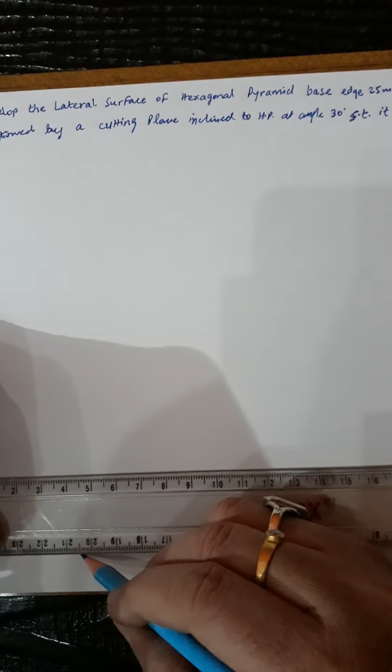So hello students, in this video I will discuss how to develop this truncated hexagonal pyramid. The base size is 25, height is 60, and the cutting plane is at 30 degrees with the HP and it is bisecting the axis. Now I will first draw this regular hexagon as usual by using the circle method. So 25 mm is the base size.

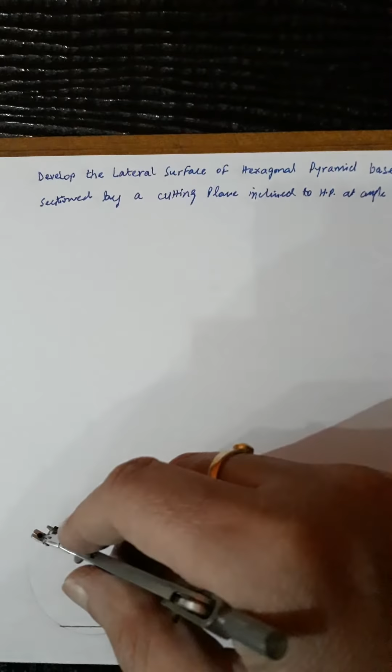Now I will be using this circle method to draw this regular hexagon. I will be drawing the circle. Yes, you can complete this circle first. Okay. Now you can divide the circle into six arcs. Now you can join all the edges, as you usually have been doing.

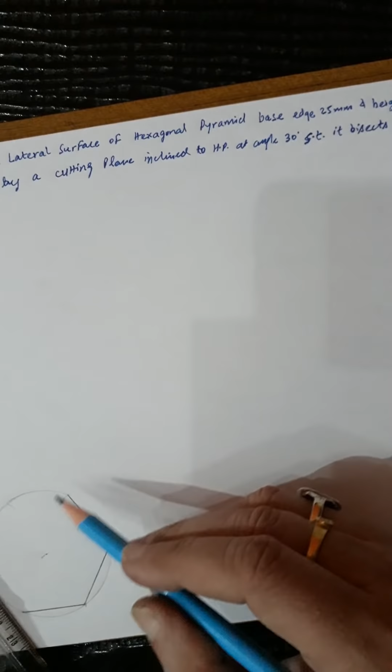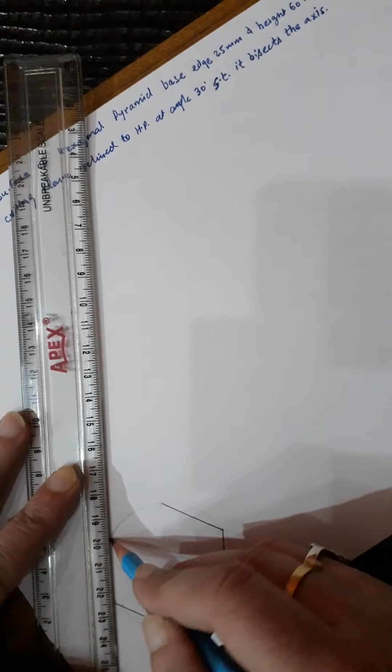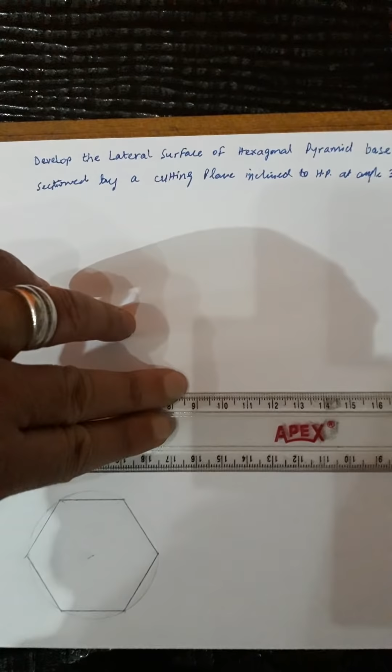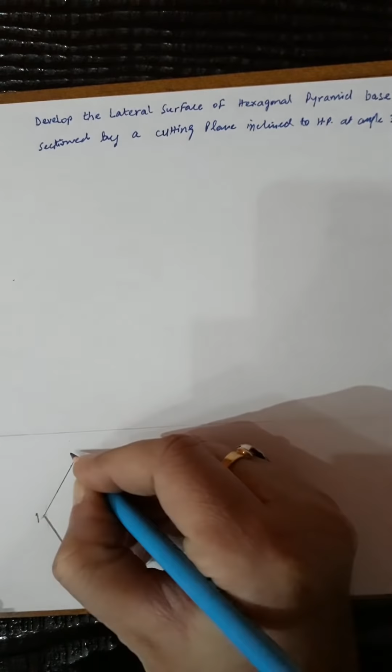Yes. And the base edge should be parallel to the reference line. That is very important. You can join, and the base edge is parallel to the reference line. So this is the top view. Now you can draw this reference line, suitable length. This is the reference line. Now you can name it as 1, 2, 3, 4, 5 and 6.

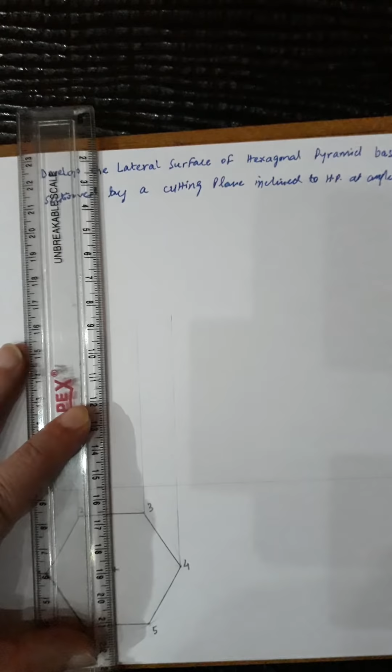Now you can draw the vertical projectors through these points 1, 2, 3, 4, 5, 6. So 2 and 6 will be lying on the same vertical projector. 3 and 5 will be lying on the same vertical projector. And there is also one projector for edge 4. Now you can draw this chain line, upward.

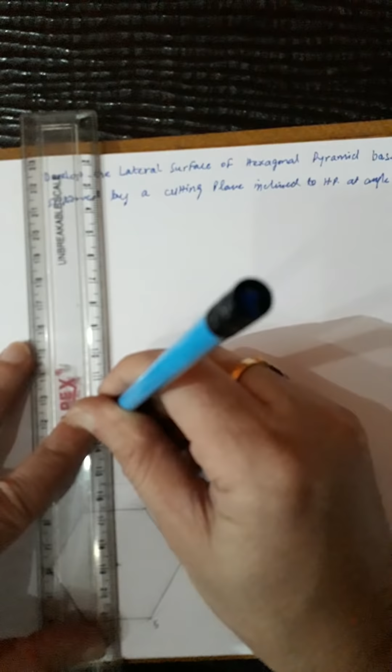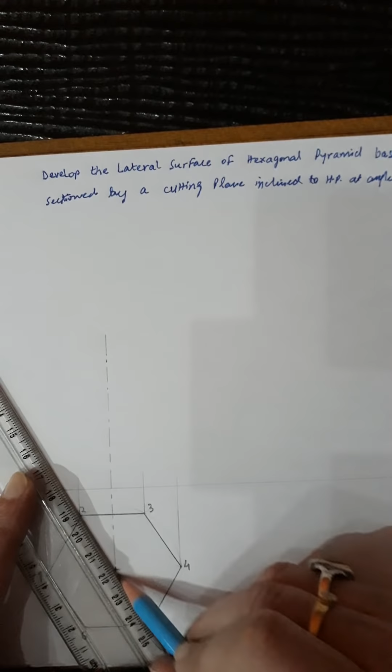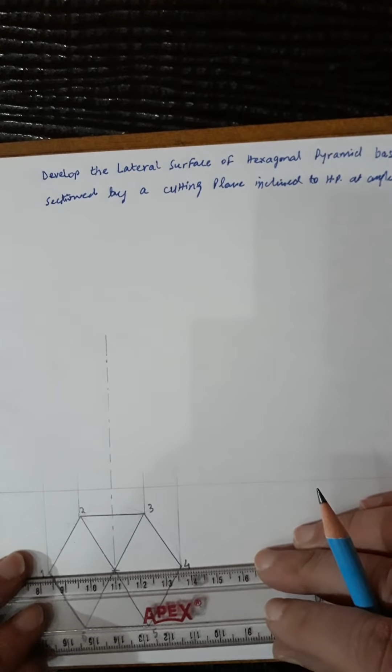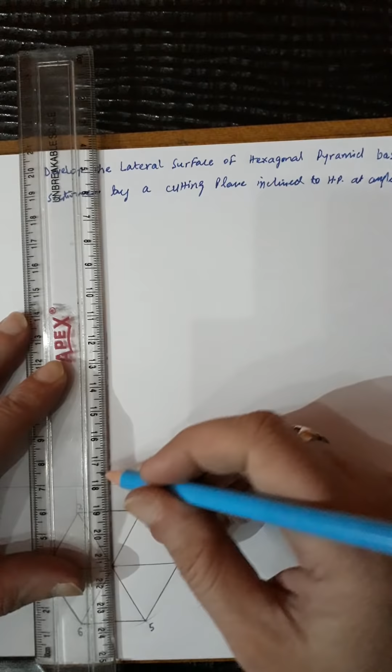You can also join 2, 5 because there will be 6 triangular faces, so in the top view they will be shown as triangles. So you can also join 3, 6 and 1, 4. Yes, this is a pyramid. Now the height is 60 along this chain line. I can measure 60 mm along this chain line: 10, 20, 30, 40, 50, 60. So this is 60.

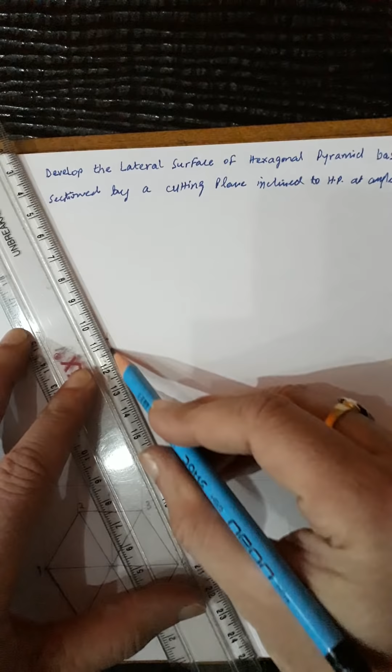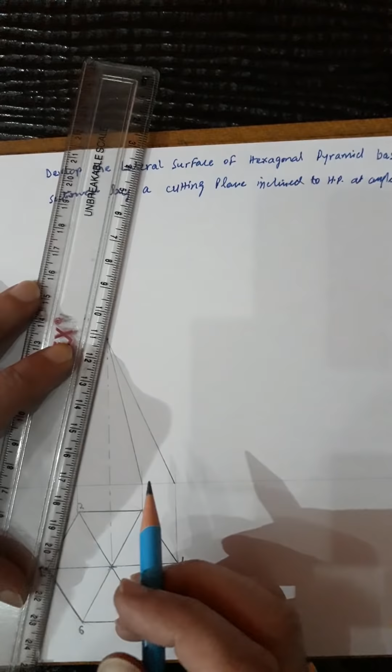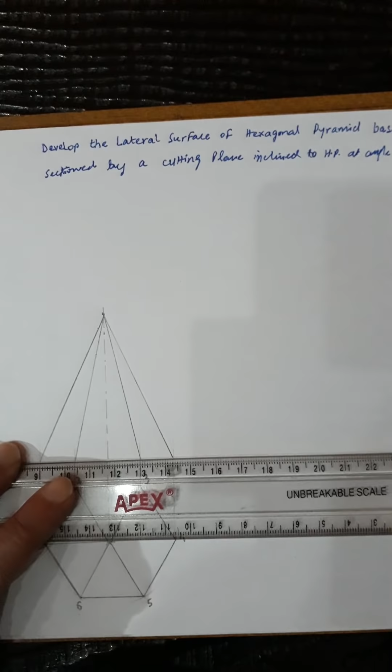Now you can join all these edges to the apex through the verticals. Wherever they meet this reference line, from there you can draw these lines meeting the apex. So this is the front view of the pyramid. You can make it thick at the base. So this is the front view.

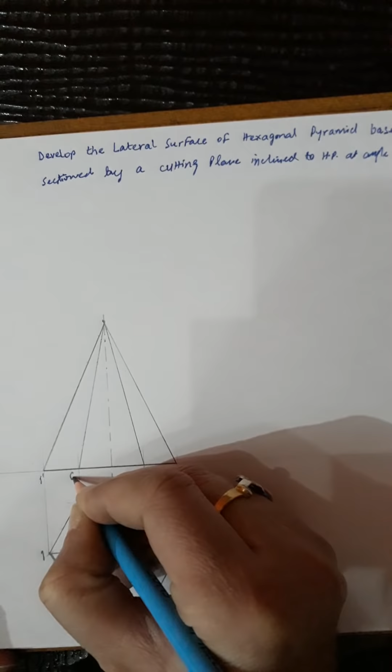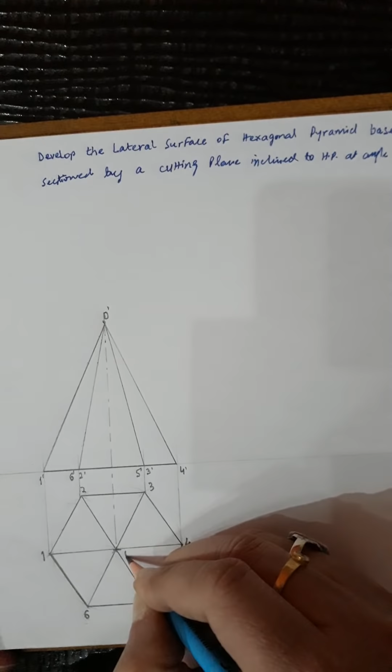Now it will be 1 dash at the base, then 6 dash and 2 dash, 5 dash and 3 dash, and 4 dash. And this is O dash, the apex, and O will be in the top view. Now the cutting plane is bisecting the axis, so since the height is 60, I am measuring 30 mm from the base. You can draw the horizontal line through this.

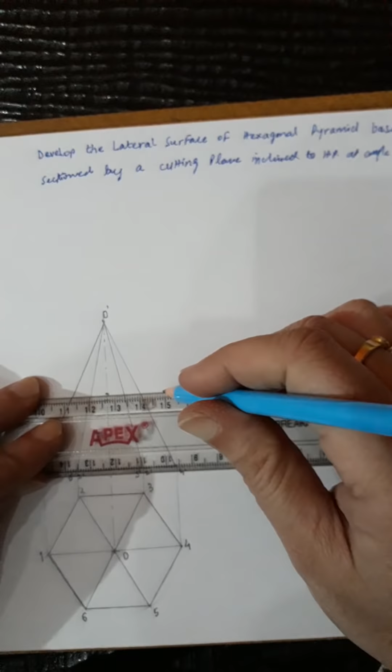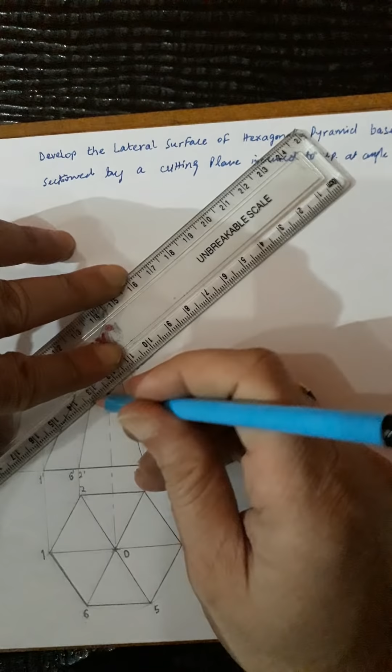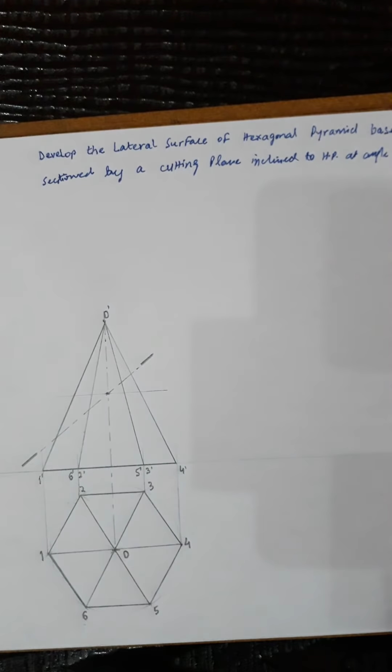Now you can measure this angle of 30 degrees and draw a chain line of suitable length, thick at the edges. So this is the cutting plane line. Now you have found these points here, 1, 2, 3 and 4, where it is cutting, so you can name them P dash, Q dash, R dash and S dash.

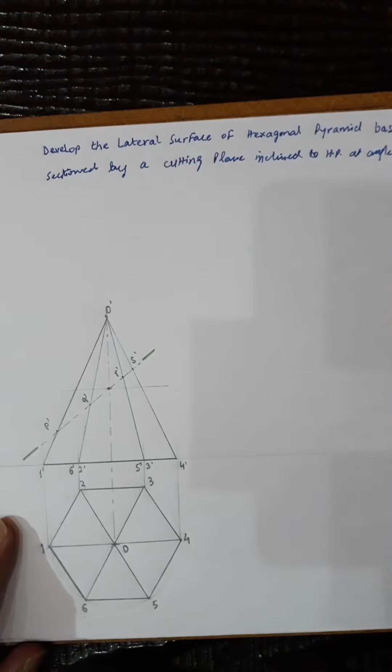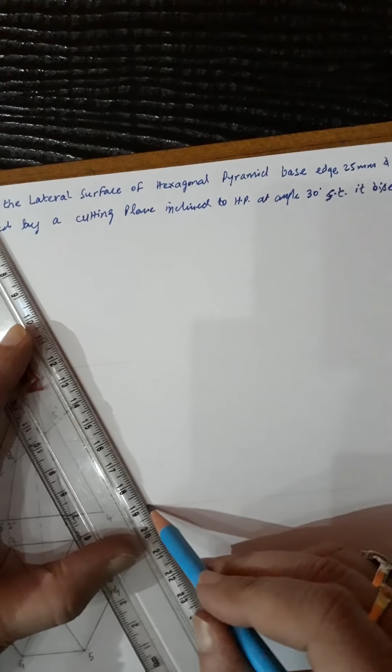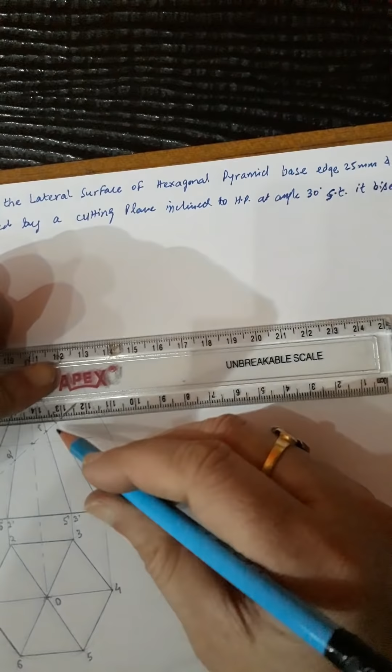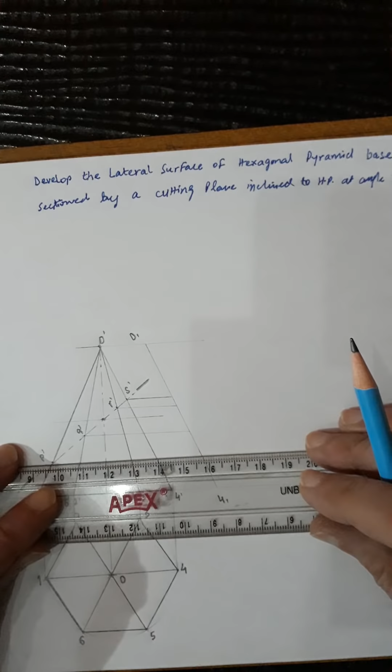Now again I will be using the radial line method. I will draw the horizontal through this apex. You can draw any line parallel to this slant, O1 and 4,1. Now you can draw the horizontals through S dash and R dash, meeting this slant O1 and 4,1, and through Q dash and P dash as well. So all these 4 points meet this slant.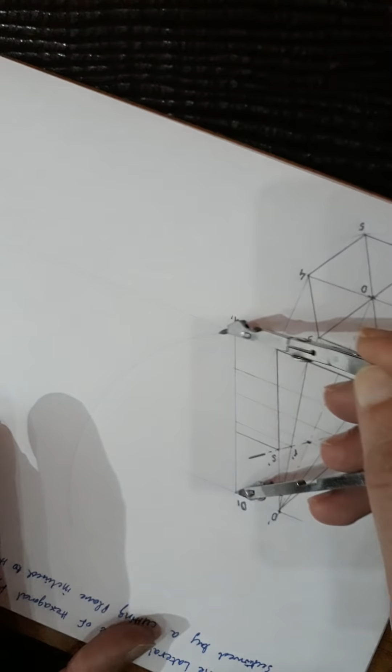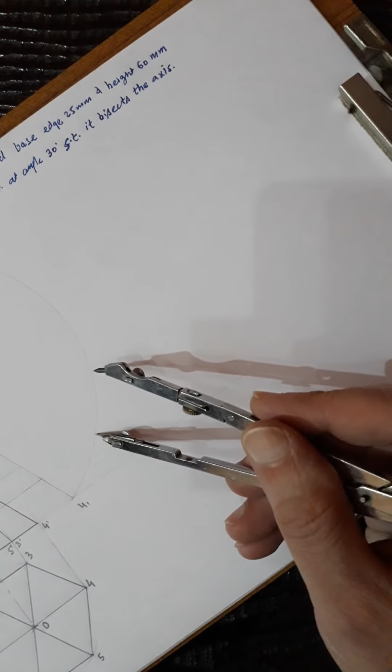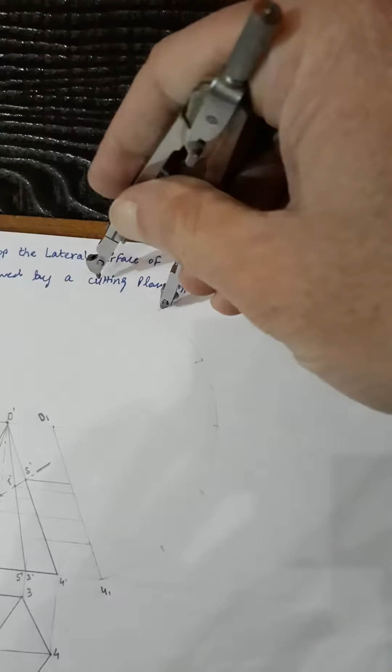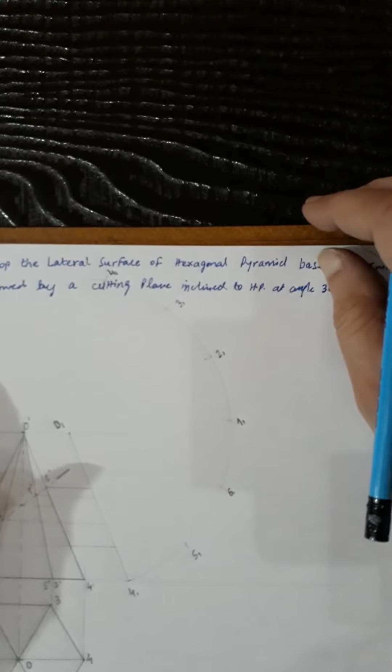Now with O1 as center and O4 as radius, you can draw an arc of suitable length. Then measure the length 4, 5 or 3, 4; it will be 25. You can simply cut it 6 times because it is a hexagonal pyramid: 3, 4, 5 and 6. Now you can name them 5,1, 6,1, 1,1, 2,1, 3,1 and 4,1 here. 4,1 is going a little bit outside, but I will mark it now.

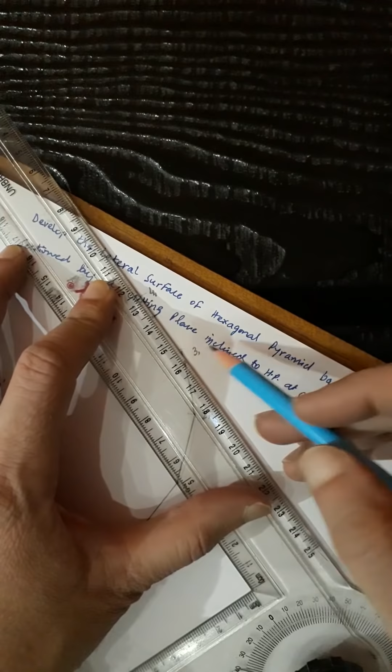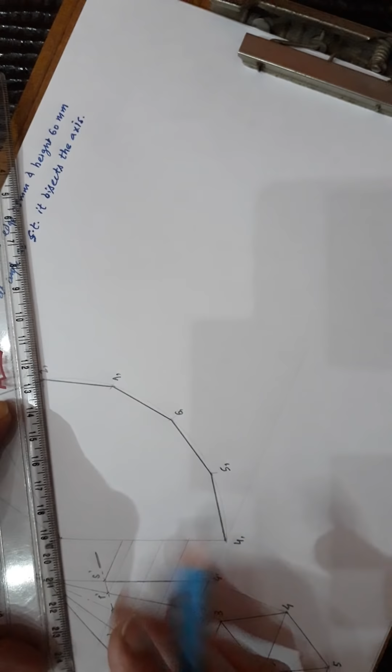You can join the base edges 4-5, 5-6, 6-1, then 1-2, 2-3, and then 3-4. Now you can also join these edges with the apex point O1. First join all 6 edges with thin lines. So this is basically the development of the simple hexagonal pyramid.

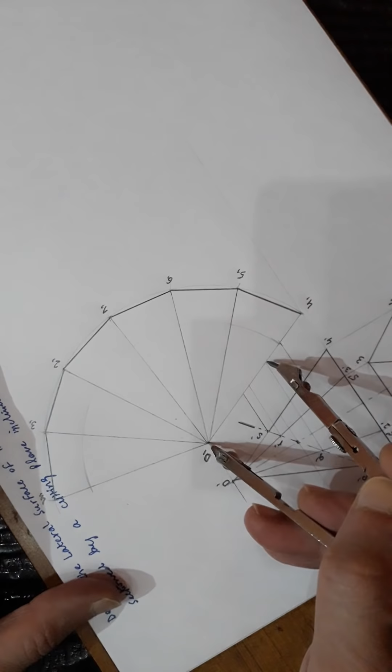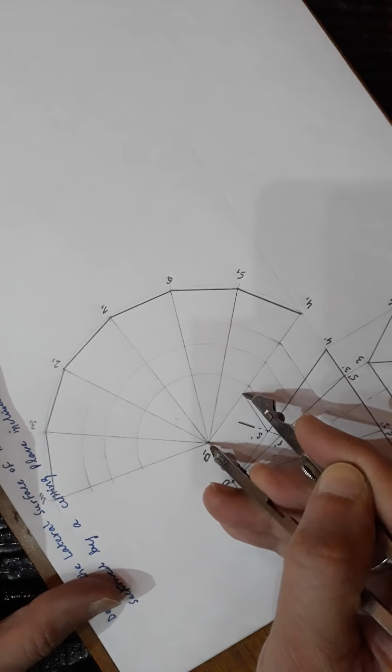Now I will draw the development of the truncated pyramid. You can draw arcs from the points P, Q, R and S; 4 arcs will be there. Here you can see S is lying on 4, so I will mark the point on 4 on both sides. R is lying on 5 and 3, so it will be 5 here and 3 here. Q is lying on 6 and 2. And P is lying on 1 only.

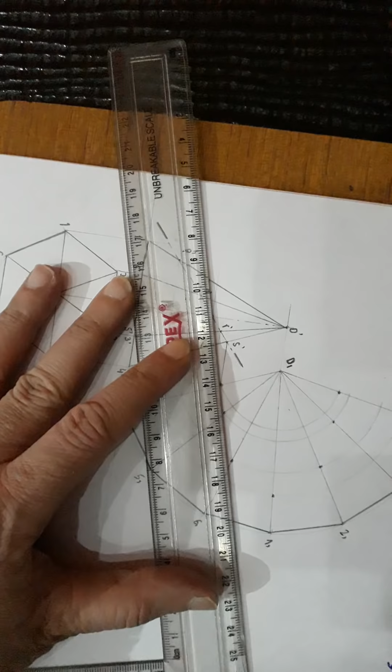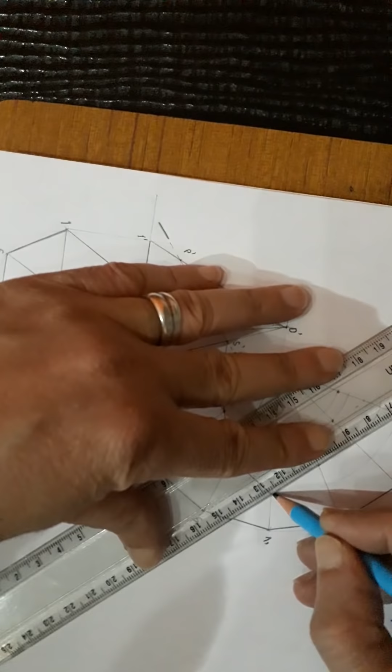Now you can join all these points with straight lines. So this is the truncated hexagonal pyramid. Now you can also make the outside edges thick, on both sides. Okay, now this is complete.

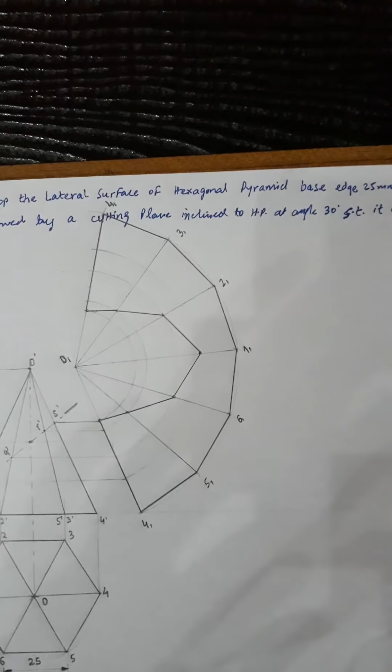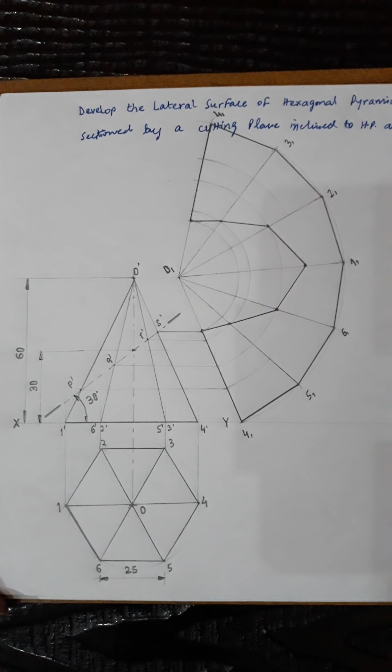I will be doing the dimensioning only. Now I have done the dimensioning as well. You can write x and y on both sides. So this is the development of the hexagonal pyramid sectioned by a cutting plane. I hope you got it.